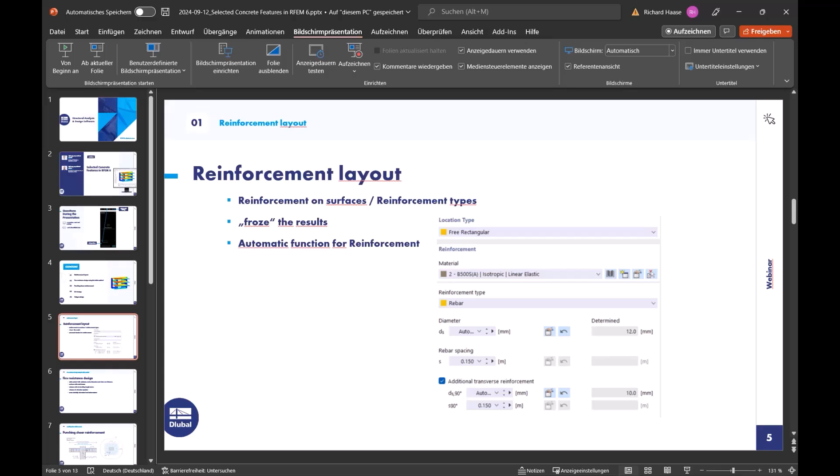Okay, then now let's really switch to RFEM 6. It's a two-story building, a simple building with some cantilever here. The materials are also normal - normal concrete and concrete steel - so nothing new and spectacular.

Important for this webinar is that you have activated the concrete design in the add-ons in the base data. All these features I will show you need this design add-on activated. And for the fire resistance, it's an additional point, but I will show you that there is a connection to the building model add-on, because in the building model add-on it is possible to define shear walls and deep beams in a simplified way. If you don't use the building model, you must create, for example, the shear walls and deep beams via result beams. The building model has a lot of other features, but I will show you this fact for the fire resistance.

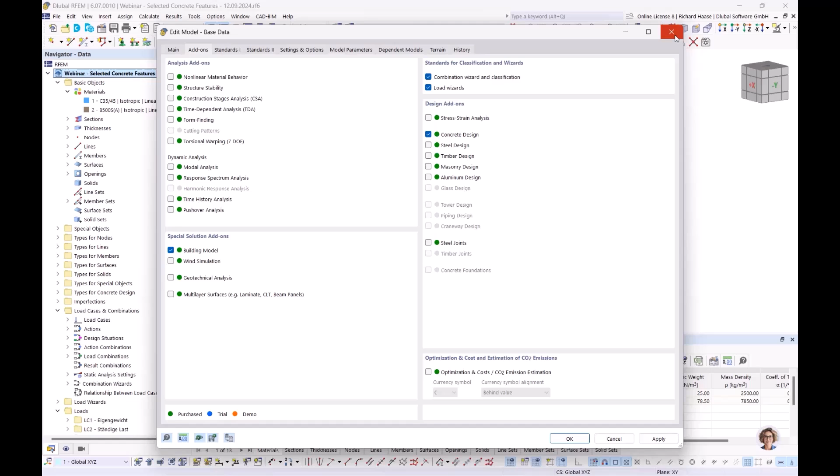Okay, but then let's come to the reinforcement layout.

I go to concrete design. We start at the beginning with the ULS, don't calculate the SLS design situations, and want to start to reduce some calculation time only with surface 18, that's here on the top, and want to calculate.

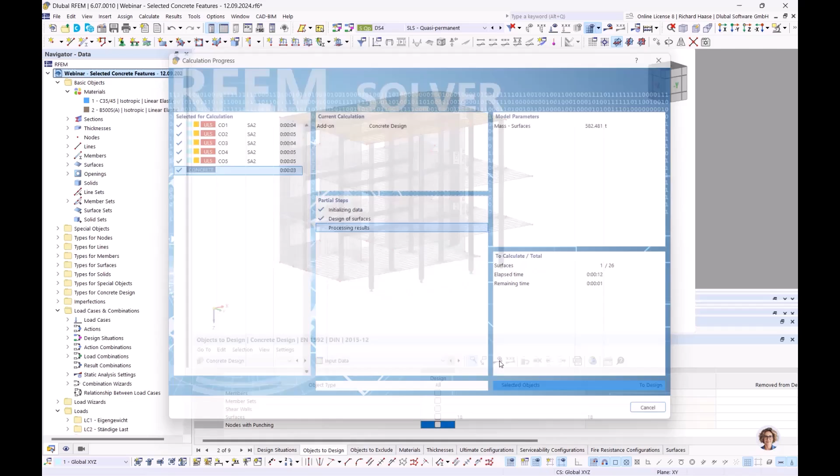So I have designed before some concrete stuff. For example, I modeled the concrete cover, and here's surface reinforcement. So I'll show you for surface 18. I define a bottom reinforcement with diameter 8, rebar spacing 15 centimeters, and on the top 10, spacing 15, and all location types on surface.

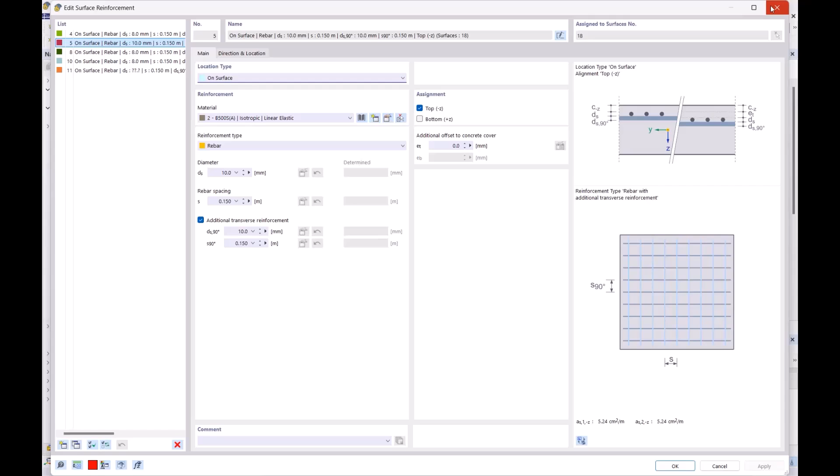So we have here what I mentioned before, this free reinforcement types. So when you choose 'on surface,' it is really on the whole surface. Maybe I can show you here the types for concrete design.

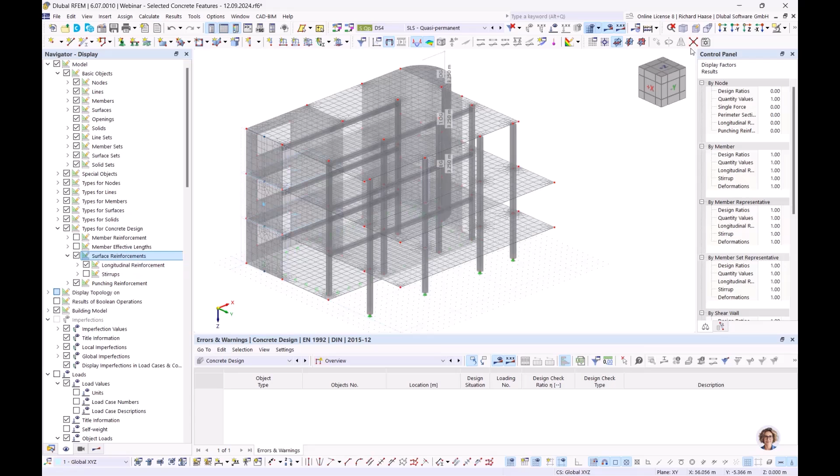The moment... oops, why don't I see it. Moment. I don't understand, on surface. Okay, here. So for example, here when we choose surface 18, we want to calculate and select this. Then you see the reinforcement is over the whole surface.

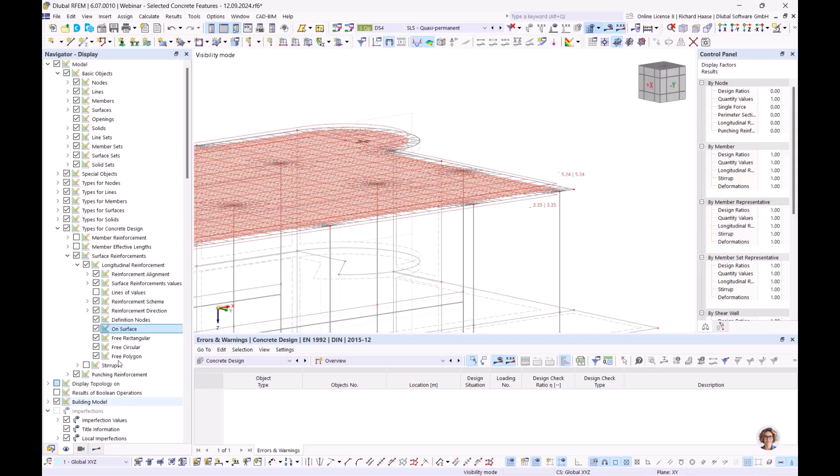On the bottom side here we have our 3.35, and the top side our 5.24. So I will deactivate it again, only to show you how you can control it.

And then we go to the results, and I want to look at the reinforcement first. So we have here 3 chapters: required reinforcement, provided, and not covered reinforcement.

Provided is what I showed you before. What's interesting here is the required. So you see how much reinforcement we need, also on the top side, and here the bottom side. And theoretically you can control it with the provided reinforcement and see where I need more reinforcement.

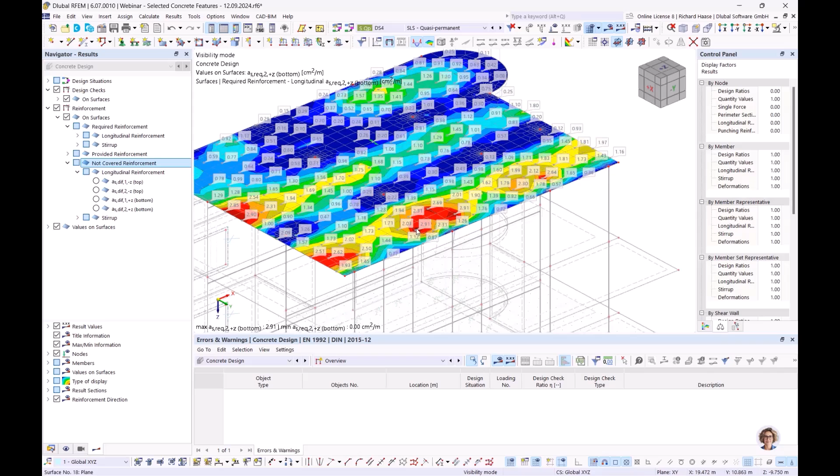To do this automatically, in an easy way, we have here the not covered reinforcement. So you see directly on which points you need more reinforcement. For example, here it's only over the columns a little bit.

Now we have the option, well, now we know where we must increase our reinforcement. And because it is such a little area, it would not be effective to increase our on-surface reinforcement. So now we want to use our free reinforcement types.

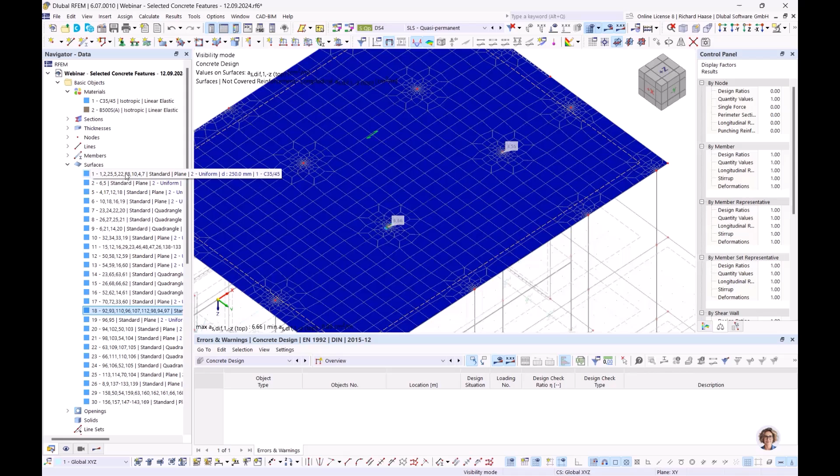I will show you types for concrete. When I use the surface reinforcements and say free rectangular, then we can choose our new automatic function. Now you can say the parameters, for example from 10 to 20 millimeter diameter, and then it interpolates between these sizes what the surface needs for reinforcement.

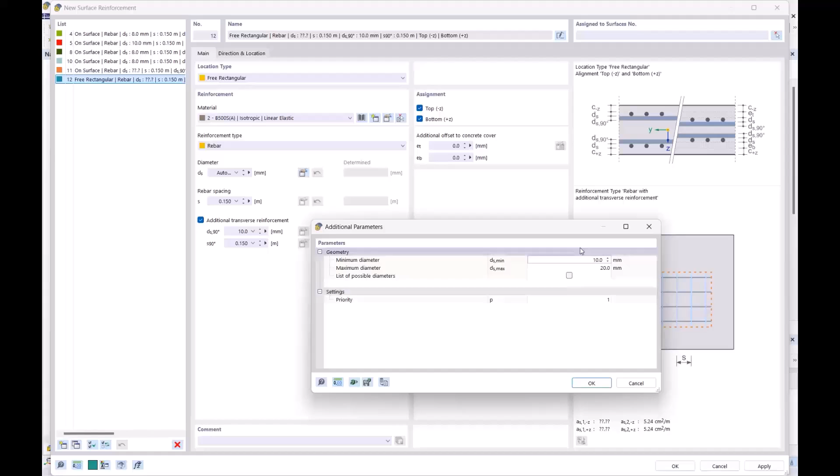So we say automatic, the same for the additional transverse reinforcement direction. Now we need the direction and location, say only on top side, and 1 meter by 1 meter, and set this point here over this column. When I say OK... oh sorry, I don't assign a surface, so we need this 18.

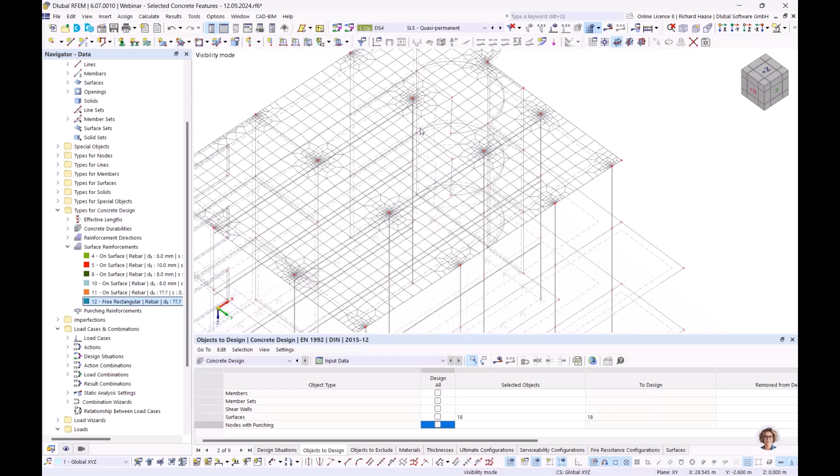When I click OK, this question will come up because we define a new reinforcement, so the program deletes all concrete design results. That's the default setting. Now we can remember that over this column we need additional reinforcement, but imagine you have a bigger model with different points, then you can't remember so much areas.

So we have implemented a new feature. Let me delete the free rectangular again and show you, in the input data under this button, the global settings for the concrete design.

And now you see a life cycle of results, and this is exactly the point I mentioned. If we deactivate this, then the results are not deleted, and it's a big point for modeling the reinforcement. I will show you.

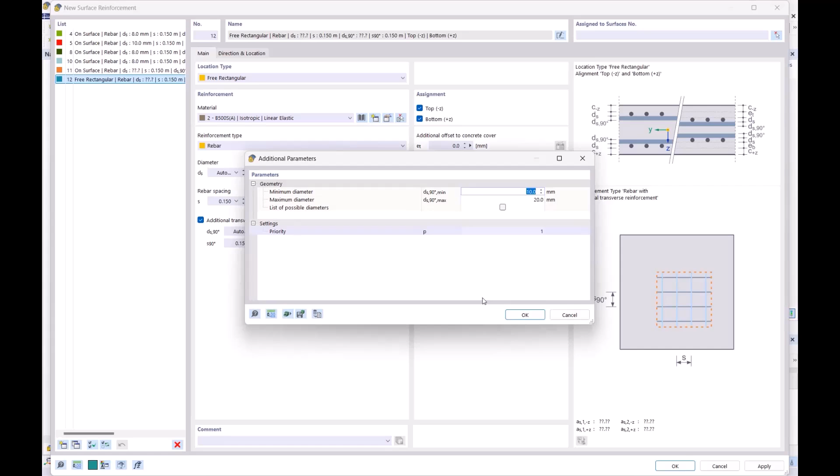So let's do it again. We set rectangular, our automatic function, OK, direction 1 meter by 1 meter, and say OK over this column. Now we have defined our free rectangular reinforcement.

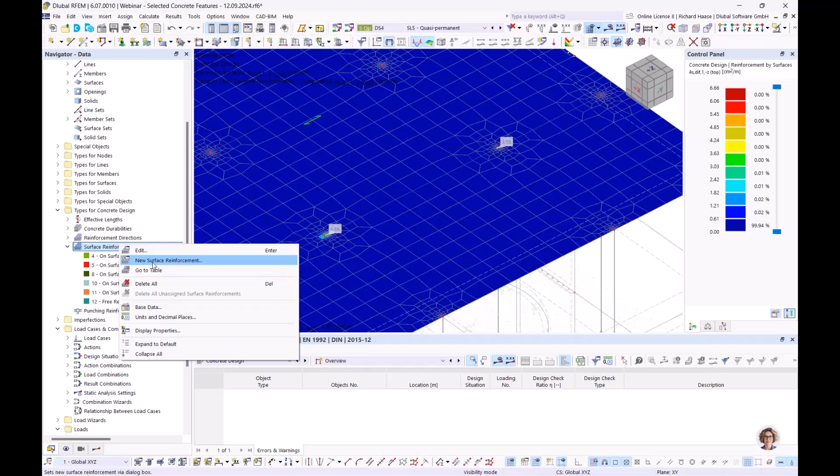And you see the results of the reinforcement is still live. That's an important point. So let's do the same automatically via copy.

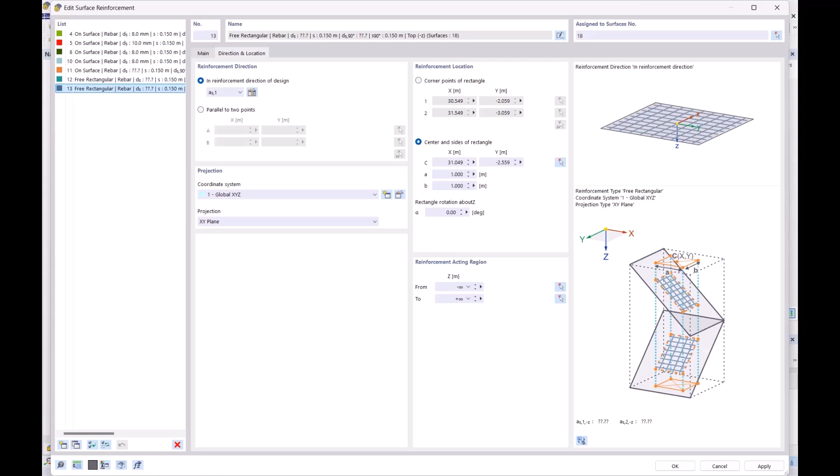Oh wait, only the top side, and say here 1 meter is perfect for us. Let's go to the other column. Okay, and now we have both free rectangular surface reinforcements with the automatic function.

So then we need to go to the input data and activate the life cycle again. Then you see we have all points covered with our additional reinforcement, and we can start the calculation.

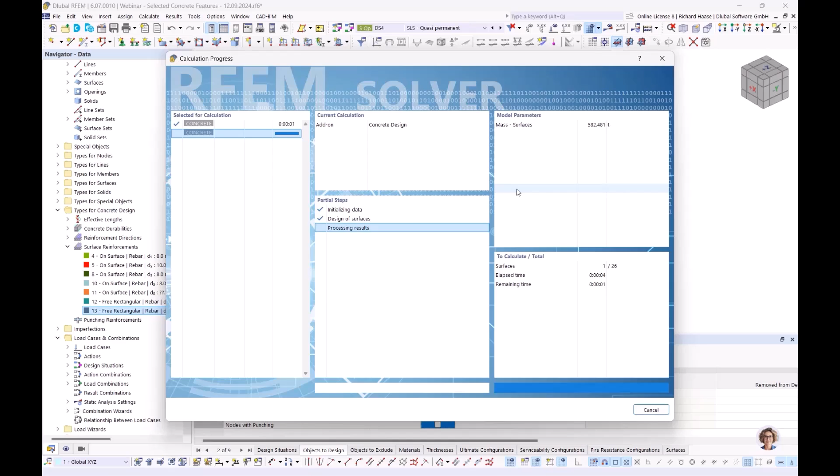Okay, here is something wrong. Wait, I think I don't get the point. 18, automatic. Sorry, now we see this, but why don't we see it here in this way?

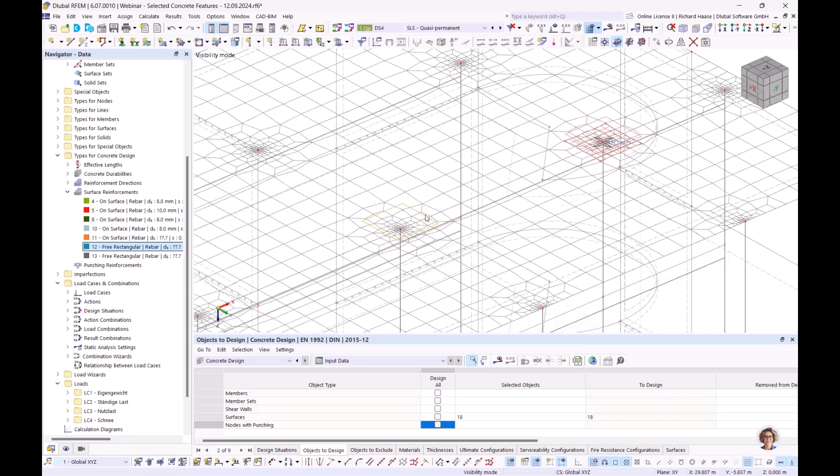Let's do this also, and see here. Okay, then let's try again with the calculation.

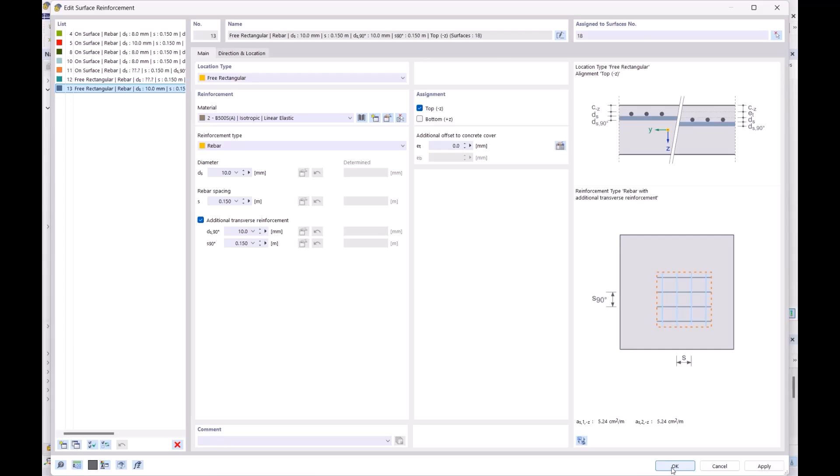Okay, so now we see here that the automatic function calculated the needed 10 millimeter diameter, and we can leave it on this automatic function. But when changing the system, for example, the automatic function will calculate again. So when we say it's enough for us, we can copy the determined value here, and all is fine. Then we have found our final reinforcement object.

So that's for me the first point, to check the reinforcement, the not covered reinforcement, and then you can also check the design checks, different checks for shear resistance and different things. And when all of these checks are with green light, then you're finished.

Customer wish was - because normally we have many more of these design checks, but there are more construction rules. They are also in the Eurocode, but a lot of customers wish to see only the required statical sides of the reinforcement, for example. So you can deactivate or activate it in the global settings, here the detailing and particular rules for reinforcement. You see a lot of points here, so it's your choice if you need it or if you don't need it. So that's about the reinforcement layout.

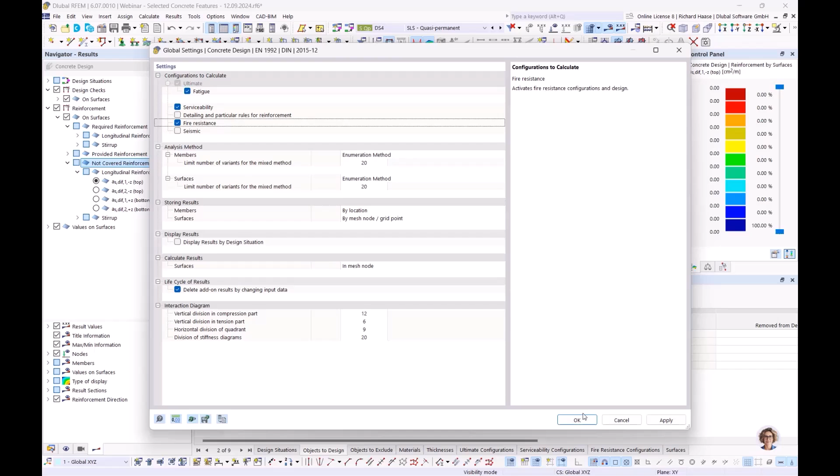Then we will come to the fire resistance, also in the global settings here. You can activate the fire resistance here. The default setting is that fire resistance is not activated. So click here, and then you can do the options and the calculation parameters for the fire resistance.

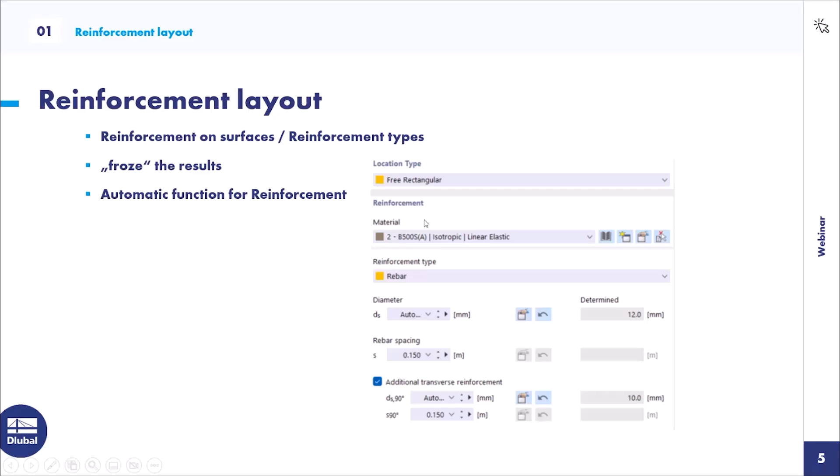Okay, then let's delete this object and switch back to the PowerPoint for the fire resistance design. So we have activated an RFEM feature now, and what we can do with the fire resistance design at this time is use a table method with minimum section dimensions and rebar axis distances, and RFEM proves if these two parameters fit for the design check.

Then what I'll show you is the building model, the surface with result beams. With the shear wall I will show you, and also for the columns, we have an additional point for the definition of fire buckling length factors. So you can calculate with normal temperature with a different buckling length factor than for the fire hot calculation. It's an important point.

Also for columns, we have next to the table method a fire duration equation. I will show you this, and also for beams. There are in Eurocode 2 two tables, one for statically determinate and one for indeterminate. So I will show you what you have to do to get the right tables, the right checks of the right table.

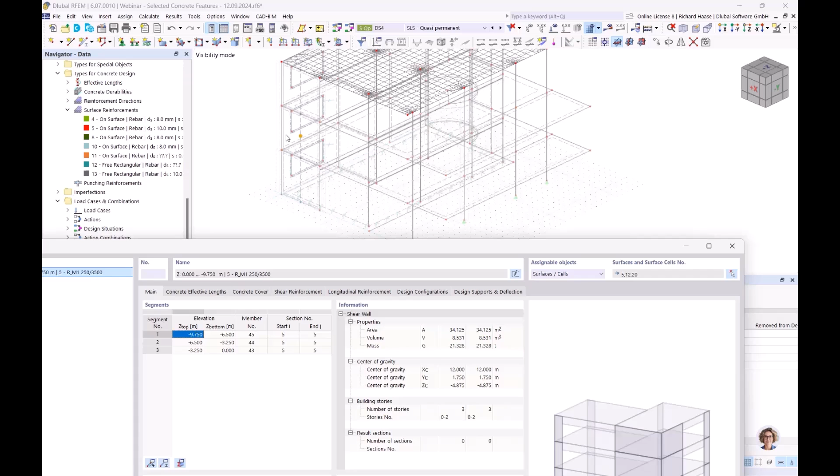Okay, then let's switch back. And you see here the shear walls. Normally you don't see shear walls here - it's all because of the activation of the building model add-on. So you can define shear walls here and select surfaces, and out of the surfaces the program automatically creates a result beam to integrate all the forces of the model at this point. Then you can define here concrete cover, shear reinforcement, longitudinal reinforcement, and so on.

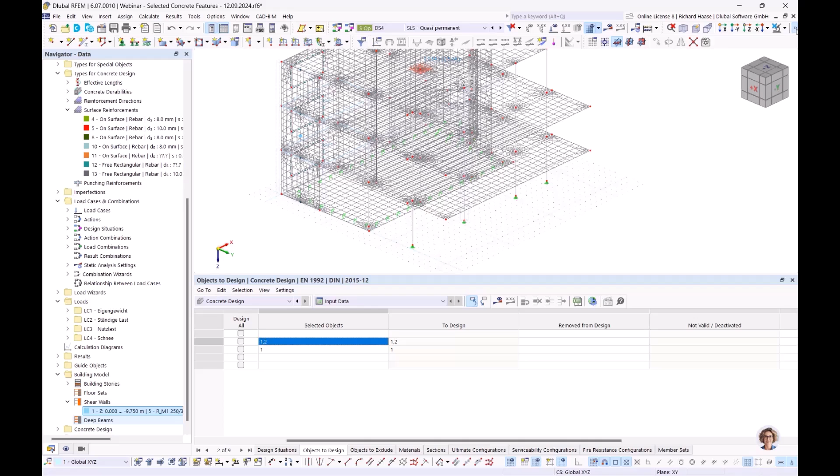I have done it before - I only want to show you the results for the fire resistance here. So let's select our shear wall. Okay, and also the member sets for our column, and also... I don't find this... oh, so transparent, for this beam here. Yeah, okay.

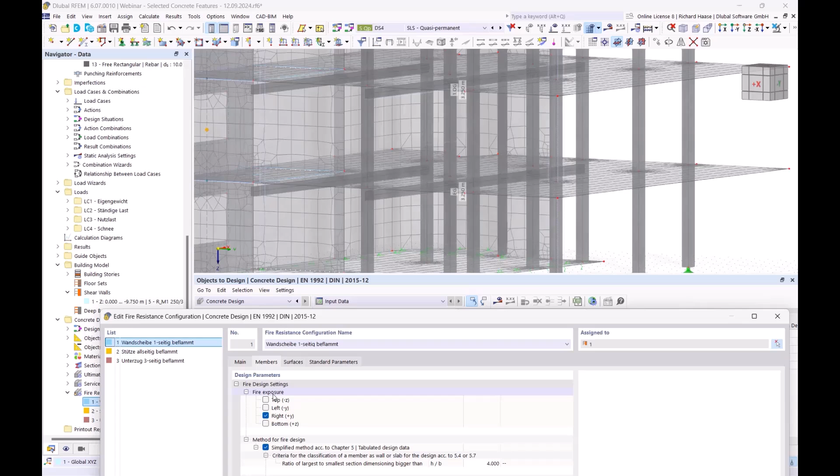So then let's switch, before we start the calculation, to the fire resistance configurations. I forgot to name it in English - translated as the shear wall, and it's one side fire, so the fire exposure. Because we have different types of fire here, we need different fire resistance configurations. For example, for our shear wall we have only fire from the inside of the building. For our column we have 4 sides, so the fire comes from all sides. And for our beams, only from 3 sides - left, right, and bottom - because on the top side we have the surface. So you need to define different configurations.

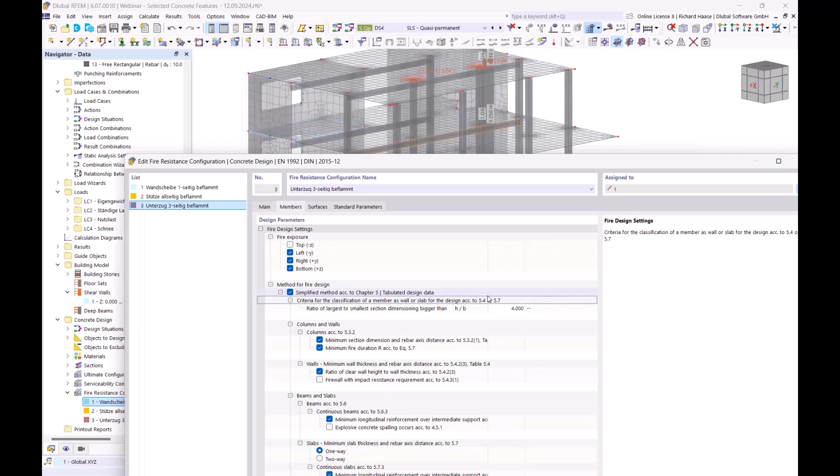Because of these generated result beams here for this shear wall, we have implemented also a criteria of classification: is it a member, a wall, slab, or a column? The program looks at the height and the width, and if it is over this definition, the program knows, okay, it's a wall, or it's only a beam.

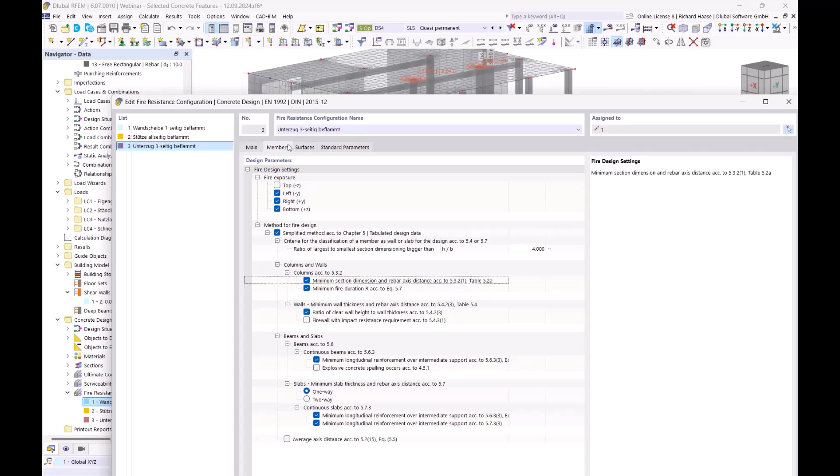So okay, for the columns, what I said before, we have 2 options. Here is the table method and the fire duration, and also other things for slabs and beams. Analog to these member settings are the surface options, but I don't need to show you. You can do it on your own. Okay, then let's start the calculation.

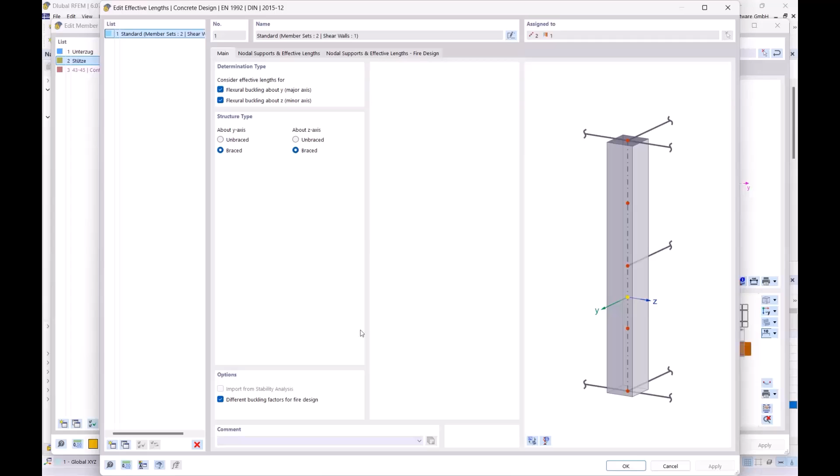Then what I told you about the columns. Here we have the options for the concrete effective length, and you also see it here. On one side we have 1.0, and on the other hand from 0.5 to 0.7, and these are the different buckling factors for fire design. Here is for normal temperature, and here we can reduce the effective length according to the Eurocode, so it's an important thing to implement and use these factors.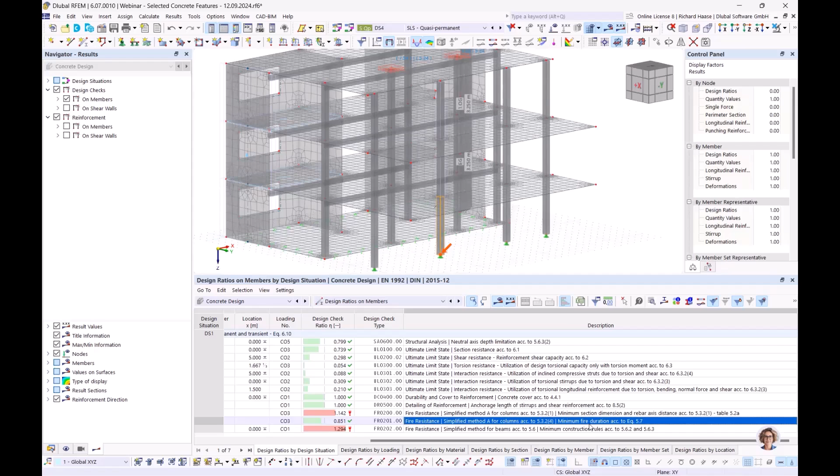Okay, good. Then design ratios. For the columns you see here two design checks: on the one side the table method, and on the other side the fire duration equation, and you see the differences. Both design checks are okay for the static, so you can decide. Sometimes one is more effective, so you have the option to choose one, and you can deactivate the not needed design check in the configurations.

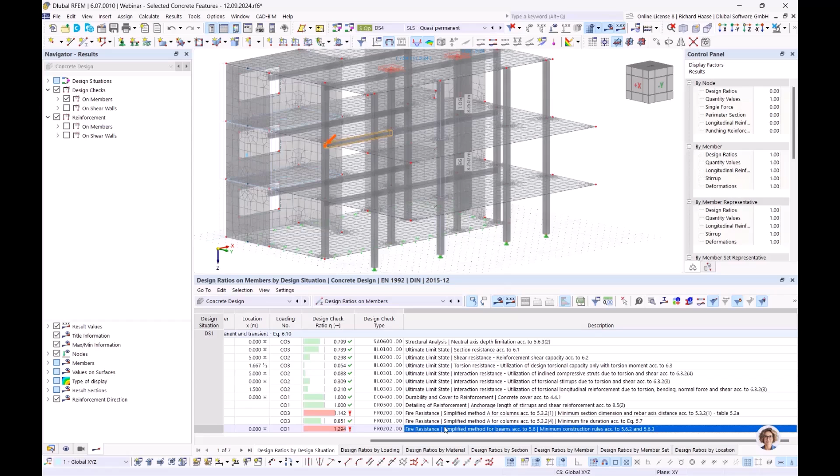Okay, then let's look at our beams. You see it's over 100%. Maybe when we check with literature, we say, why are we over 100%? The point is that here table 5.5 is used, and table 5.5 is for statically determinate beams. So why does it choose the, let's say, wrong table? That's because you need to model or set some points at the design supports and deflections.

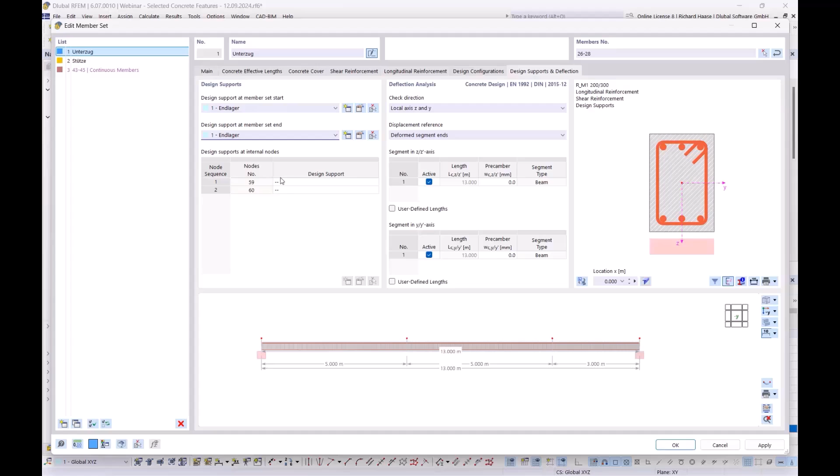At the moment the program sees it as a 13 meter long one-field beam, so we need a final support, and for these internal nodes we can choose the other, and I show you the difference. I set at the start and end points this type, so there's no inner support, and on the internal nodes I use this inner support. So it knows it's one long beam, and you will see in a few seconds the difference.

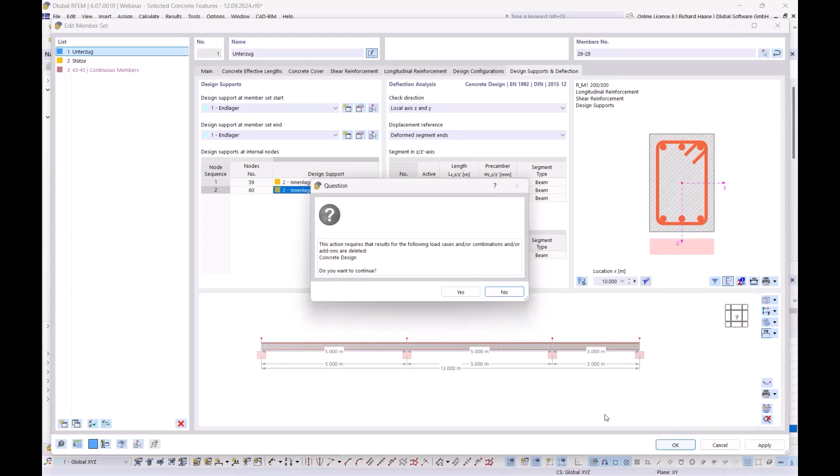So we were at 130%. Let's check now and go back to design ratios for members. And now you see the beams are at 94%. Before it was table 5.5, and now we see it's a statically indeterminate beam, so it can choose table 5.6, and you have different values. So it's important to define these supports.

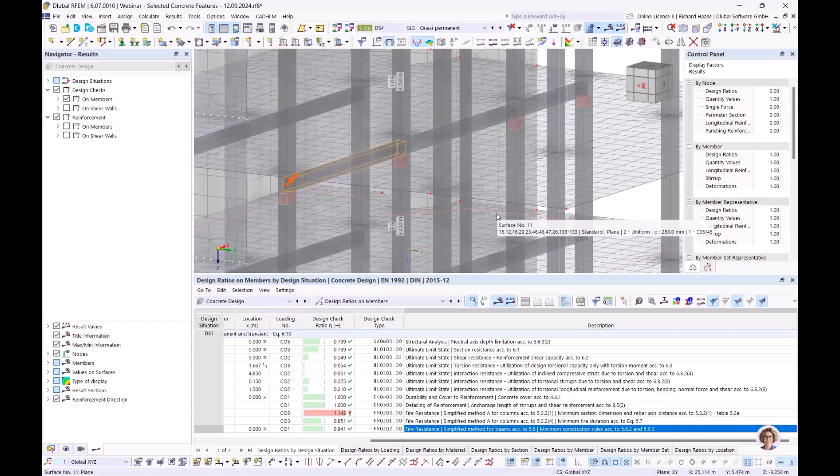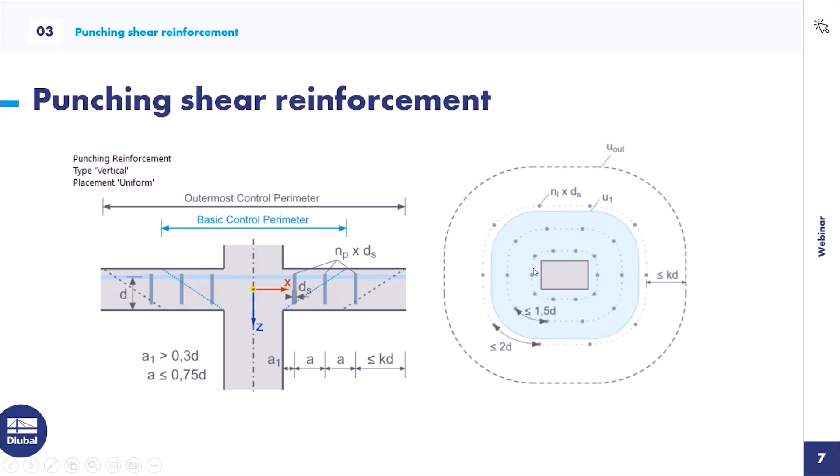Good. Then let's go to the next point. I will delete these points for better overview, and we will switch back to the PowerPoint, and now we are on the theme punching shear reinforcement. Those are the pictures, and maybe I show you directly in the program, that's easier to understand. I want the 28 nodes with punching. Let's start with a calculation.

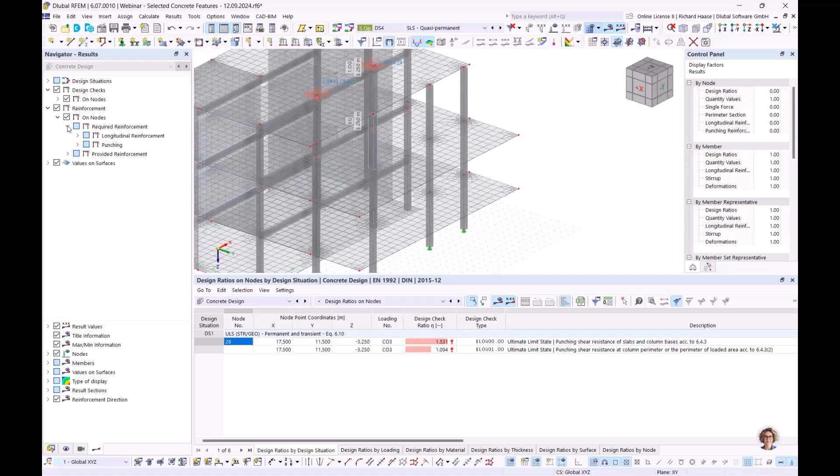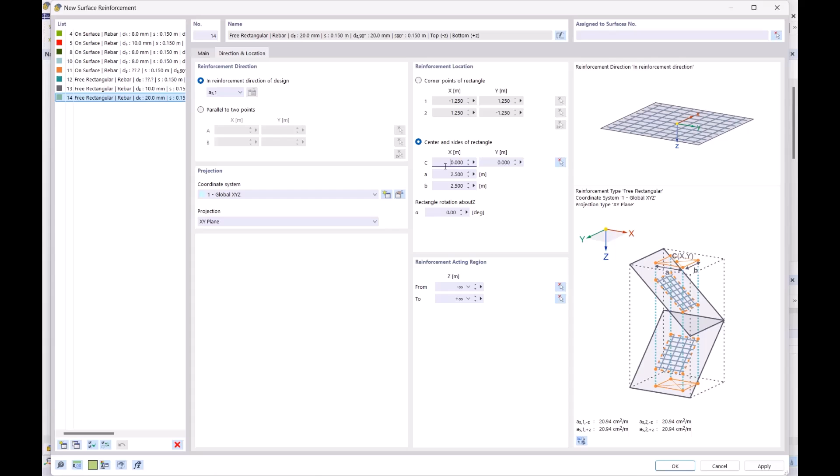Okay, you see our actual reinforcement is not enough for this. So this is the first point: when you see it's over 100%, you can define additional surface reinforcement. Let's see how big it should be on the top side. Okay, so 24 under 30. Let's do something in this area, say 22, 15, 20. Let's start with a lower one. Free rectangular, choose the sides 2.5 meter. It's a little bit lower, but you will see it gives some better results.

I forgot here the surfaces. Okay, let's calculate. Then you see it needs more and more again. So at this point, you don't get this problem away only with additional longitudinal reinforcement. So let's see what it has done with the punching.

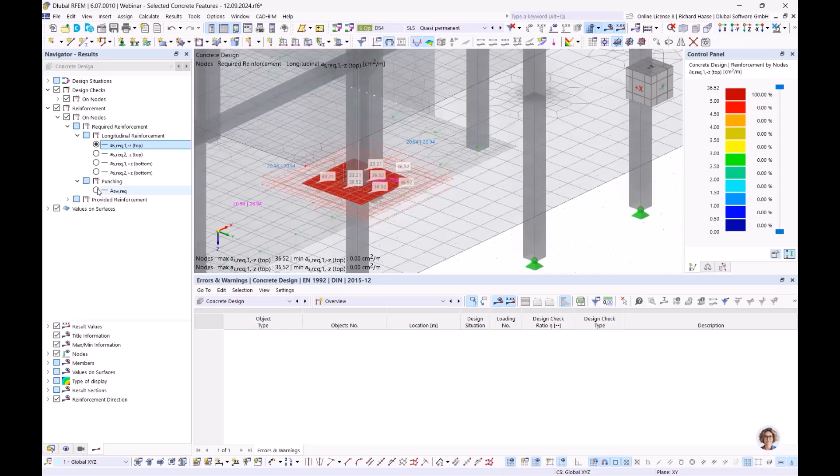And it says we don't need it. Sorry, that should be... Maybe I made a mistake and chose another concrete. Let's check it. Sorry, let's switch back to 37.

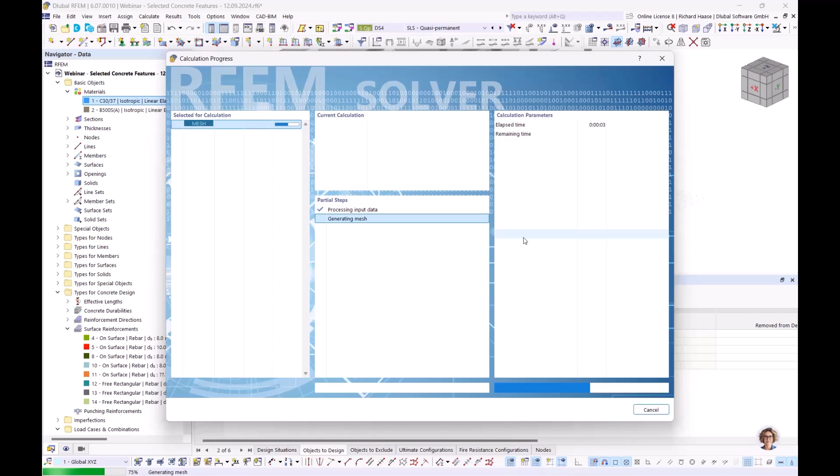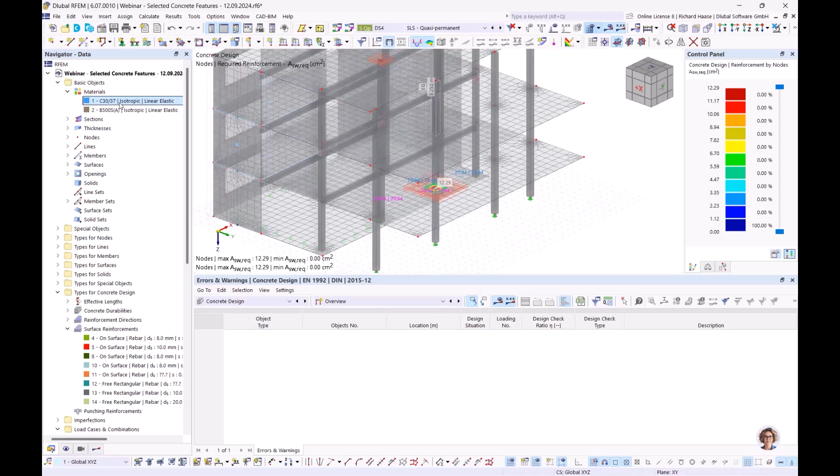Yeah, okay, sorry, I forgot to switch back to the other material. So now we have required punching reinforcement, and you see that it has 3 areas with different values.

So let's create some punching reinforcement. I will set a new one, and here you have the options between uniform and different. For uniform, on each perimeter you have the same number of legs, and for different you can define on each perimeter a different number of legs.

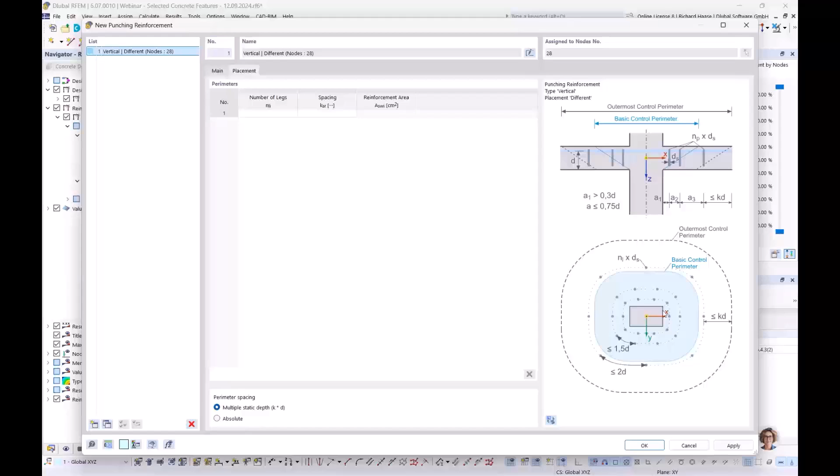But I would stay with uniform for this example, and let's say 4 perimeters and 16 legs in each perimeter. Okay, and now you see also the reinforcement. Let's calculate again, and now, wonderful, we are everywhere below 100%.

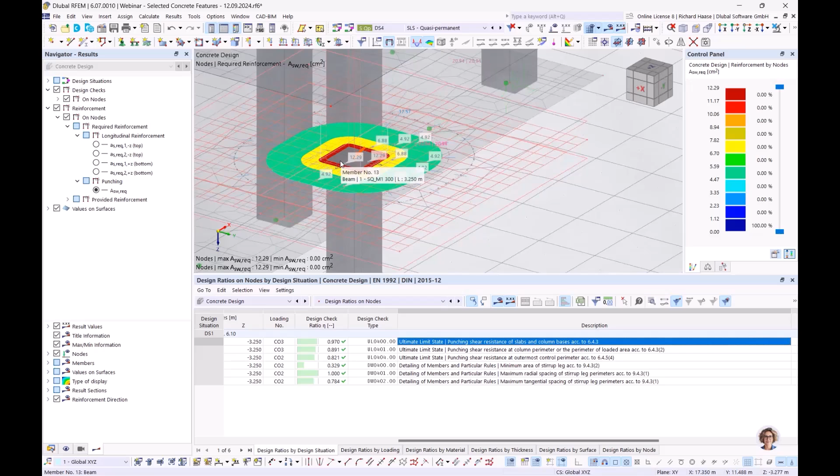And the thing is, you would expect that the inner circles are okay with the 16, but on the outside perimeter you don't reduce the number of legs, and this could be because there are also detailing checks. So the leg distances on one perimeter can be a reason that you need more legs.

So it's not only the numbers, it's also the detailing of members and particular rules which can make you need more legs on a perimeter. But okay, I only wanted to show you how you can design such punching reinforcement. That should be enough for that, and let's switch to the next chapter, the SLS design.

We will look at the deflection analysis and limitation of steel stress, and you will see we are independent from the ULS design, so we can analyze it and get required reinforcement only for SLS results. So it's a good point. And then I will show you the creep, shrinkage, and tension stiffening effects. If you don't know tension stiffening, I copied a description from our homepage, so you can read this.

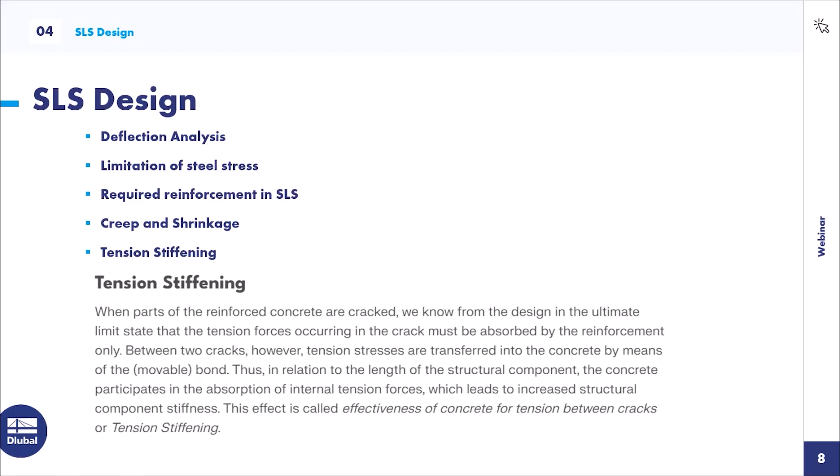But in the end, with tension stiffening, in the normal way you calculate with an uncracked section or with the completely cracked section, and tension stiffening gives you the possibility to use the areas which are not cracked, so that you can use this stiffness. Maybe I'll show you in the model, it's more clear then. Okay, let's switch back to RFEM.

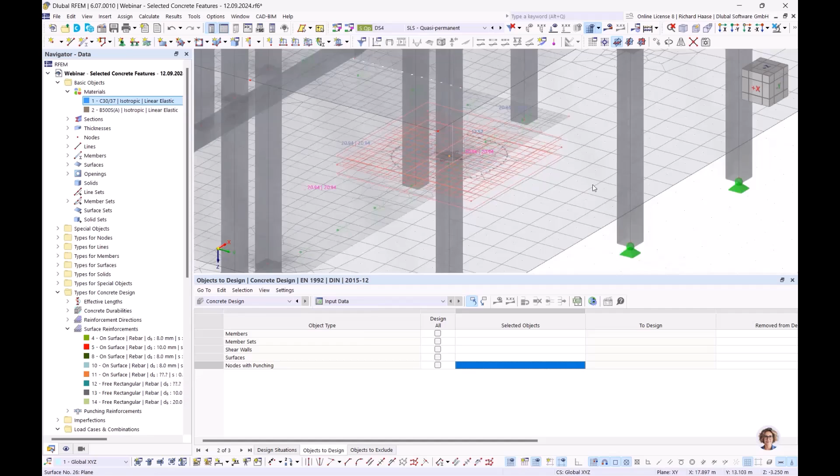Let's delete this, and I want to show you the SLS design checks for surface 30. For the deflection, it's the first point you must control when you go to the surface: deflection. First the surface type, you have the option double supported, the normal surfaces, and also cantilever. So you must do it in a manual way.

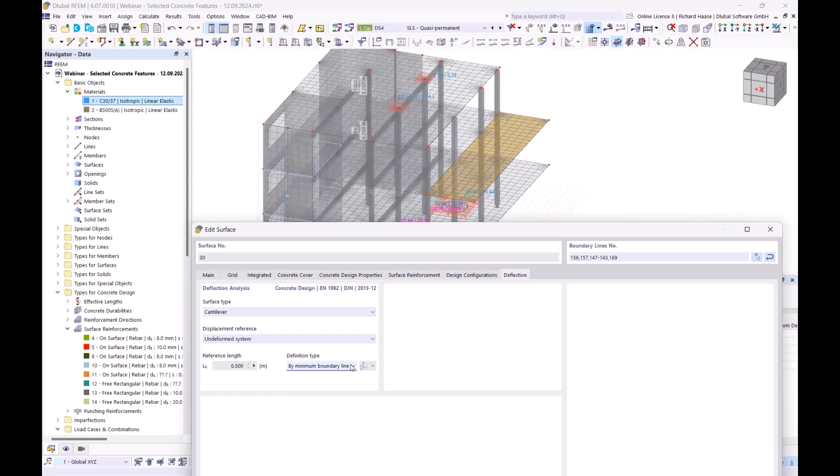So we have here a cantilever, and for simple surfaces that functions very well, for example these maximum and minimum boundary lines. But you see, when you choose the maximum, you have here this 14 meters, which is nonsense. And when you choose the minimum, it's 50 centimeters, I think because of this little area. But you have the option to do it manually, and we need this from this column to the end of the surface, 3.50 meters. So you must control it for the deflection. That's very important.

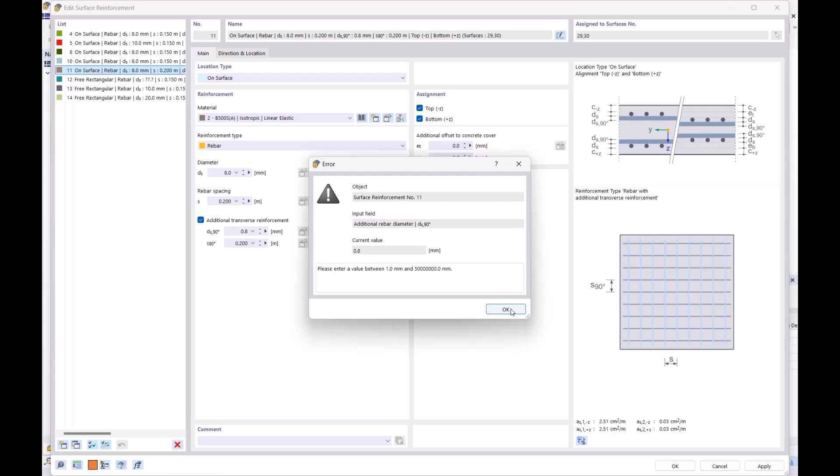Okay, when we have chosen this, I will check again, and take a small reinforcement so that we see the effect better. Let's look at our serviceability configurations. We have here the limitation of steel stress, and the normal case is that it uses characteristic design situations, and relatively new in RFEM 6 is that you can also use other design situations.

For example, here quasi-permanent or frequent, and you also have these individual options for the crack analysis, or also here for the deflection analysis, where quasi-permanent is the default setting. You can also do it for frequent and characteristic. So it's a nice option to have. Okay, then let's deactivate this, and let's look at the limitation of steel stress first, and start the calculation.

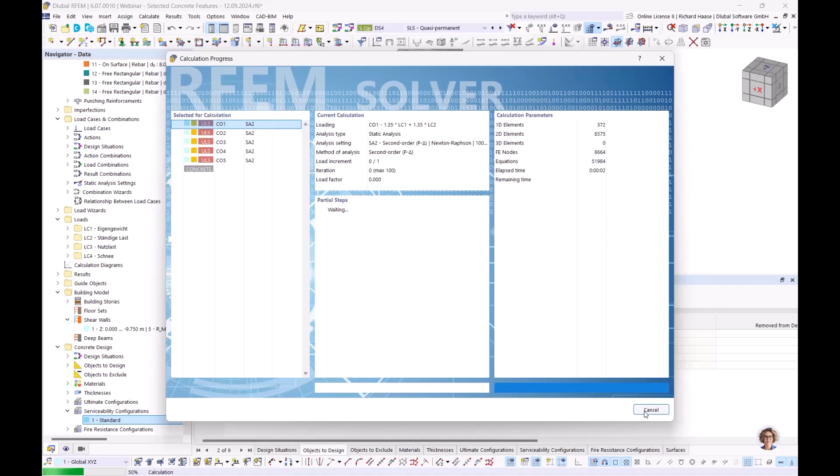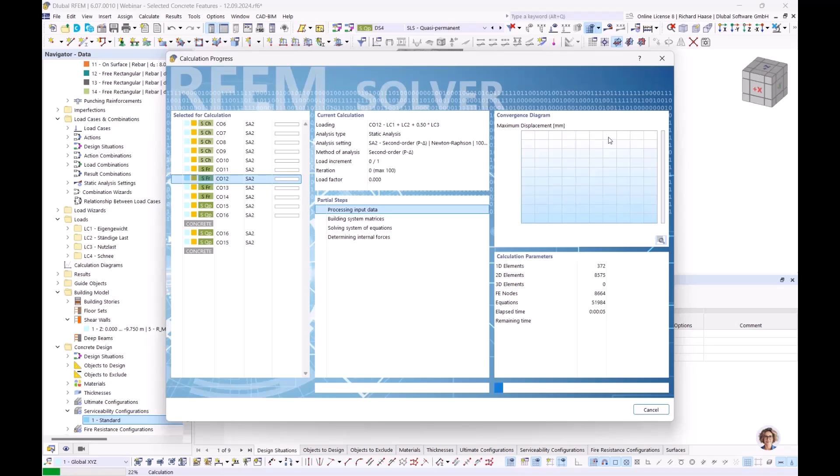Okay, maybe mesh and calculate it new. Okay, now I see my, sorry. Yeah, of course, we must switch back now and don't want the ULS and switch only to the SLS design situation types. Okay, sorry. Let you see that it's independent from the ULS, and you can analyze the influence of only SLS calculations better.

Okay, fine. So design range is okay. You see here the stress limitation is quite over 100%, and you have here only the provided reinforcement, and so we have an option. Normally it's activated, but I want to show the difference. It's a determination of longitudinal reinforcement, and this strong feature, when I activate it, you see which points will be taken for this calculation.

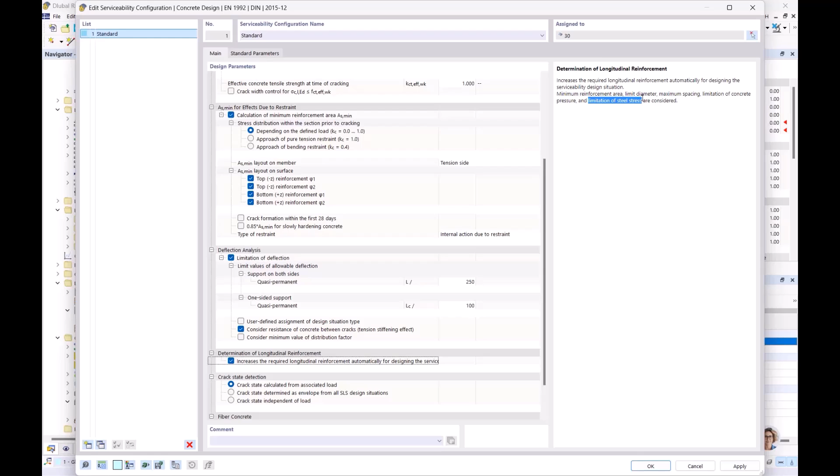So for example here, limitation of steel stress, and you know, before we had only the provided reinforcement, and this button, when we activate it, okay, we must calculate new, and 130% maybe, remember, for the steel stress. And now when I calculate it, okay, then you see 99%.

And why? Because now we have not only the provided reinforcement, we have also the required and the not covered reinforcement, and this point shows when you set in the required reinforcement, or better the not covered when you have it, then the steel stress can be done. So you only need to model this needed reinforcement. Yeah, that's a big point here.

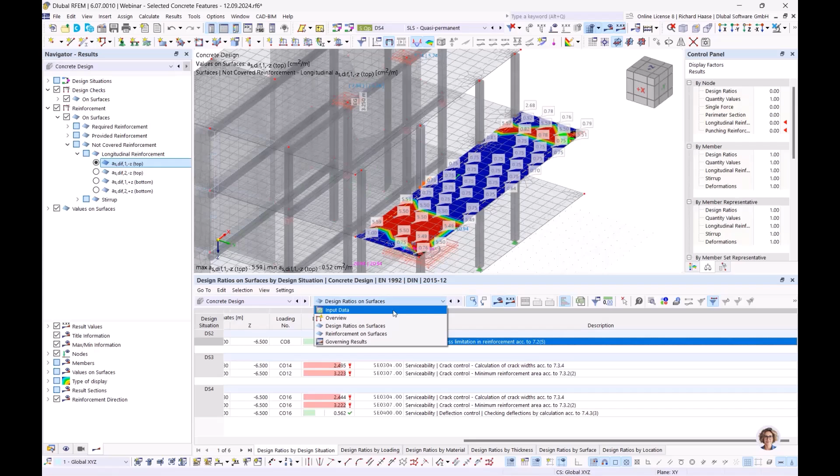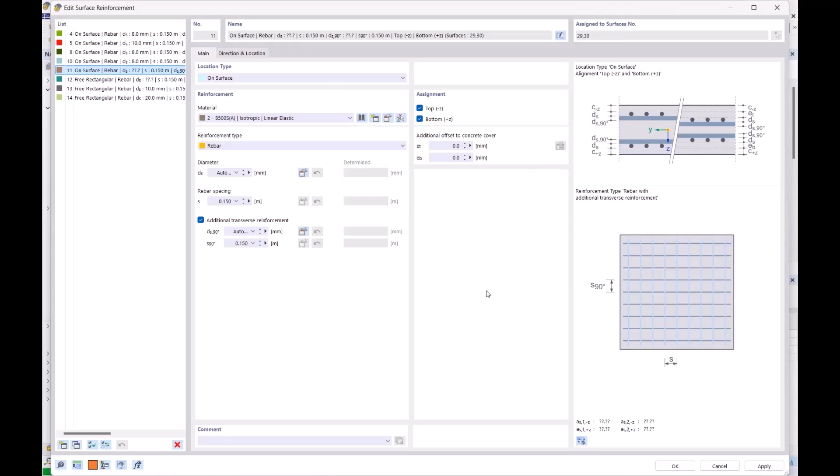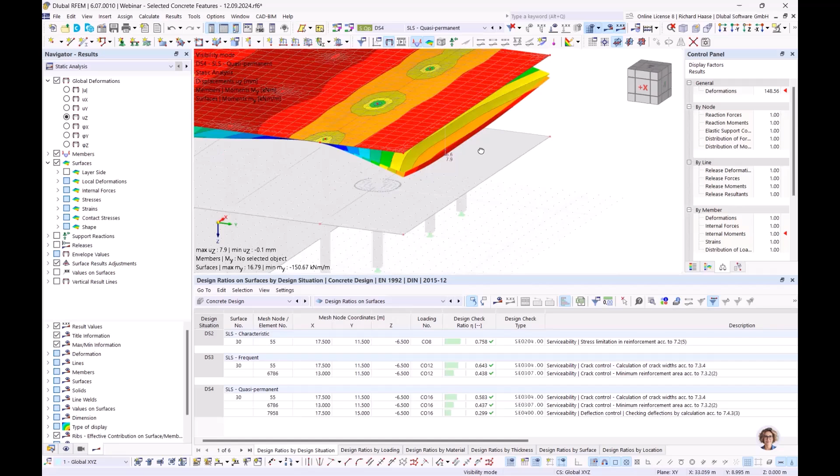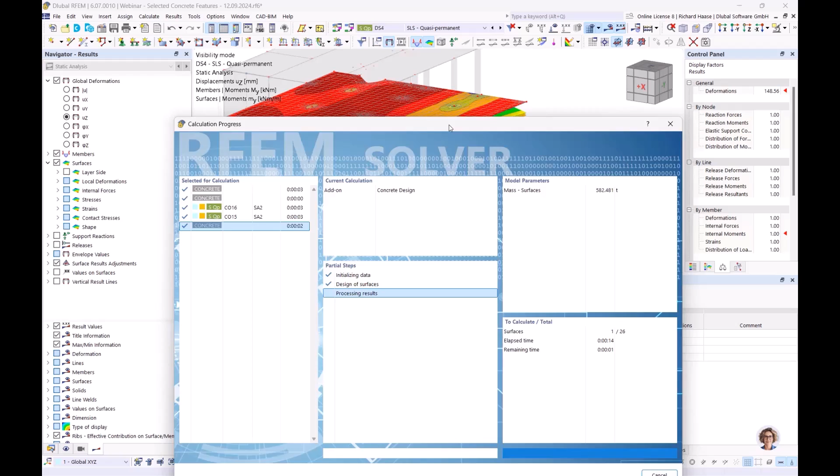Yeah, good. Then let's come to the deflection. So we have here our quasi-permanent calculation, and we want, wait, let's maybe have it. So now we have, okay, a deflection of 8 millimeters, and now I want to show you this tension stiffening, deactivate, okay, sorry. No, wait. Come on. Yeah, that should not. The 8, nothing changed, sorry. But I want to show you the tension stiffening later.

So let's take the materials and go to the materials for concrete. And now you have here a new chapter, time-dependent properties of concrete. And you see here the creep and shrinkage. And when we activate it, so remember the 8. Okay. That's the default setting, but not important for our example.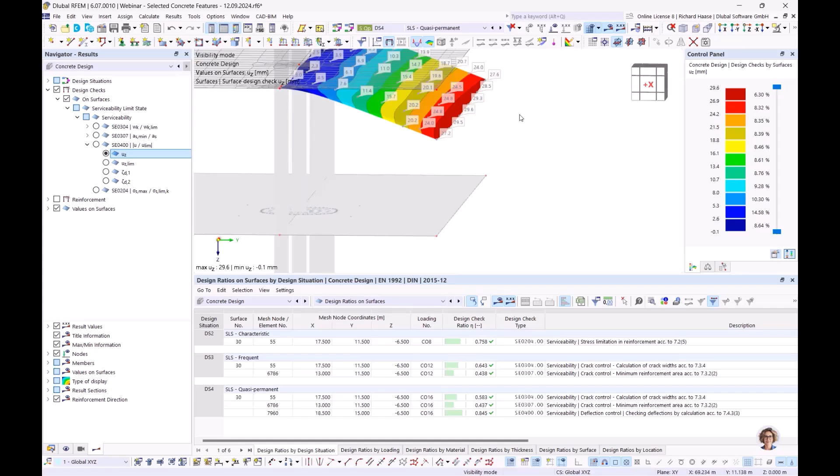Okay, then we must go to the surface checks, and we see here the U, the limit is 35 millimeters, and now we have, okay, nearly 30, and so it fits to the normal factors when you say, okay, that's the normal calculation and the calculation with creep and shrinkage, so it's a good value.

And now we have the zeta, and the zeta is the status, I say, of cracking of the objects. And you see here, it's everywhere 1.0, so it's a completely cracked section, completely cracked with 20, okay, let's say 30.

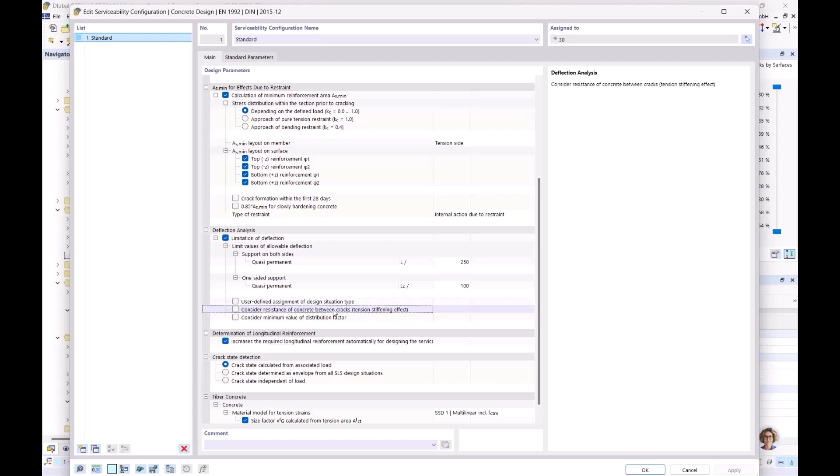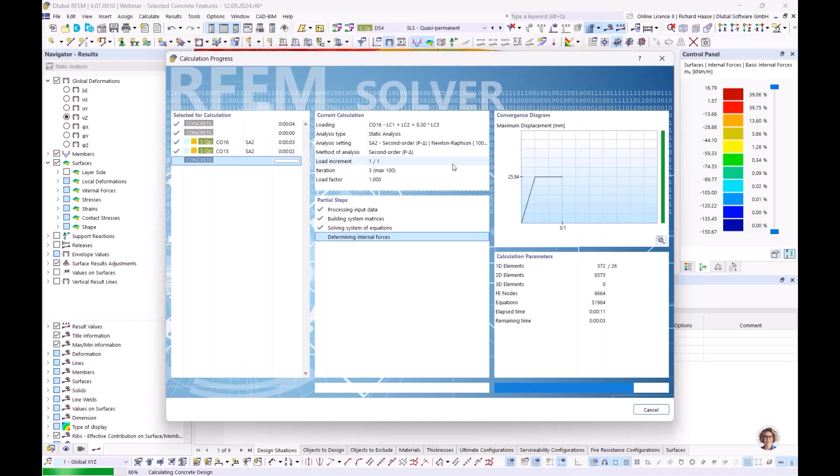And now what I try to explain is the tension stiffening. So you can consider the resistance of concrete between the cracks. And now let's activate this. Okay, and start. So 29.6 without. And 29, and you see here it's 26. So the tension stiffening shows its positive effects.

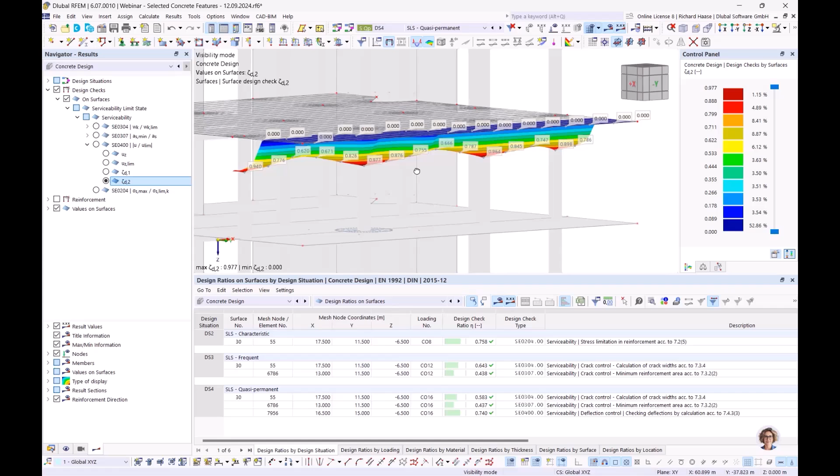And let's again look at this zeta value, and you see here, near the columns where there is high danger for these cracks, it's nearly 1.0, but in the other areas it's between the uncracked and the completely cracked sections. And this has an influence on the deformation. So that's tension stiffening and the creep and shrinkage effects. Okay, that should be it for the SLS design checks.

Then let's switch back to the PowerPoint and go to our last chapter. It's fatigue design.

And I created another model, a more simplified model for you, only for understanding. So we have two alternative fatigue designs in RFEM 6. Level 1 is a simplified design check, and in the Eurocode there is an allowed stress range, and for this design check you aren't allowed to go over this allowed stress range.

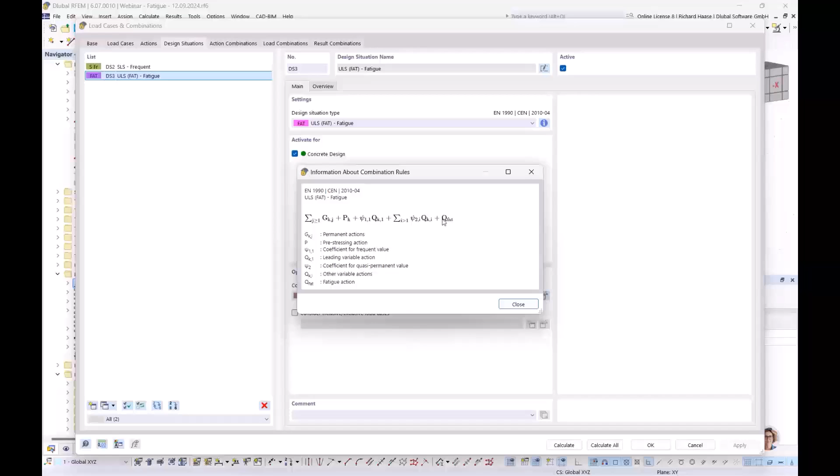And for level 2, you need its own combination. It's nearly the same as SLS, but here you have an additional parameter. It's this QFAT, and this QFAT is without reduction coefficients. And for this QFAT value we have implemented, you can select it for imposed loads.

That's traffic. There you can choose this. You say, okay, that's a fatigue load, and out of these definitions, RFEM creates a new action, and then you can say, okay, alternative, and have these loads here.

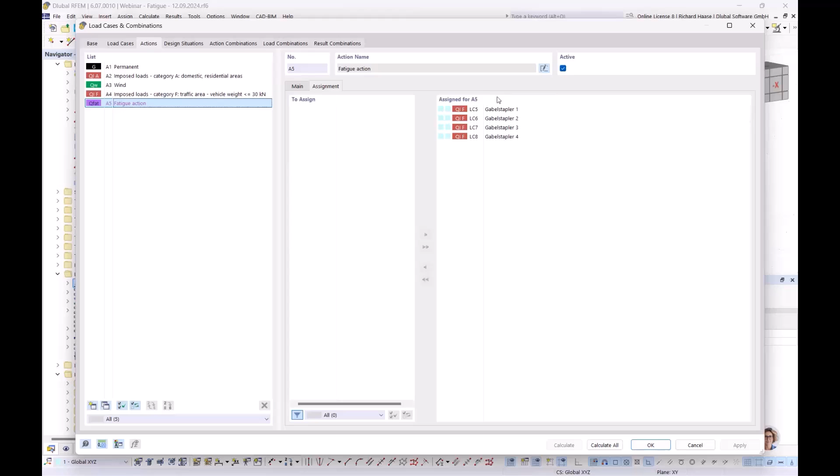Okay, then let's first see the loads. That's permanent, and here the loads. Here the wind, and here is the big load, the fatigue load. And so you can switch between level 1 and level 2 in the ultimate configurations under fatigue, level 1, level 2.

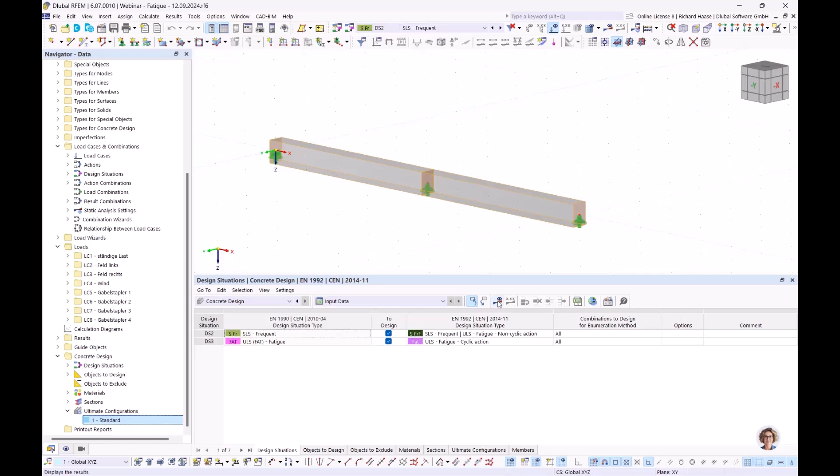And when you choose level 1, then you must also choose the design situation type here, the non-cyclic and the cyclic. So level 1, level 2. Then let's start the calculation for the level 1 results.

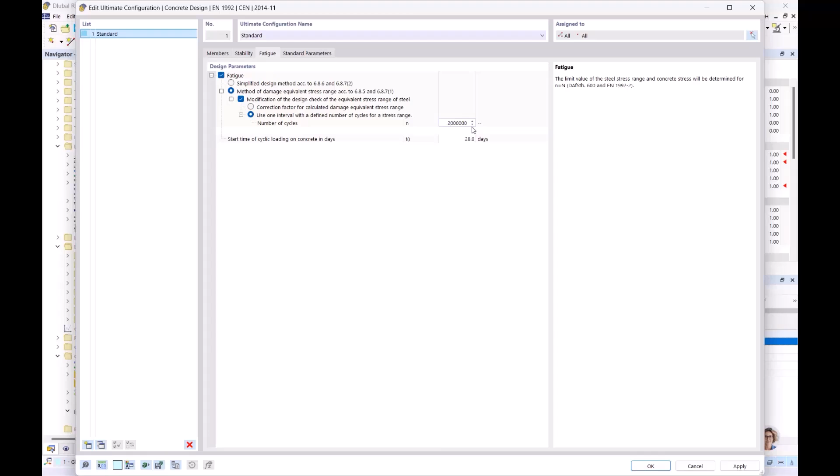Okay, then let's go to level 2. As I said, here the number of cycles, so 500,000, or we can also say 2 million number of cycles. Okay, and then the level 2 design check.